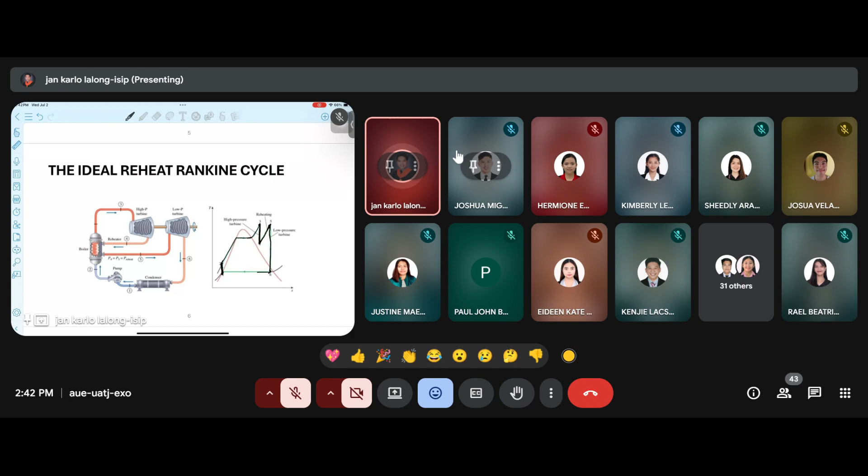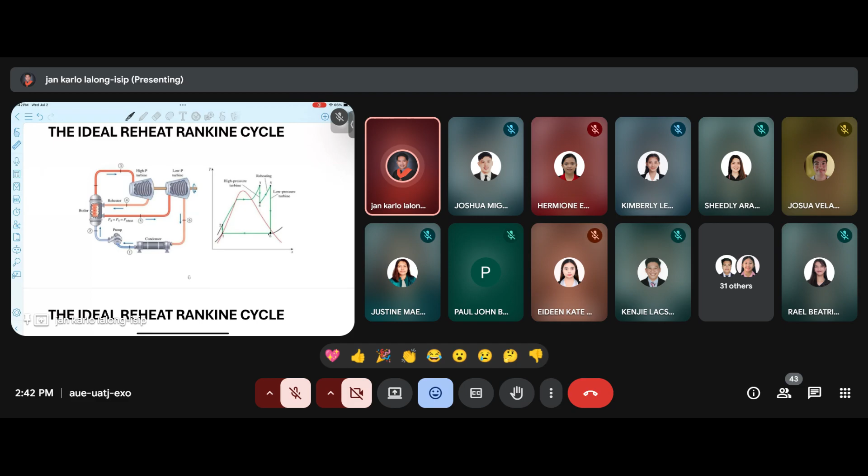Okay, so ito yung magiging itsura ng ating TS diagram, and this is our schematic diagram. But don't worry, the computations are still the same as what we do in our ideal Rankine cycle. Okay, so may iba lang tayo when it comes to our heat added and also our work ng turbine.

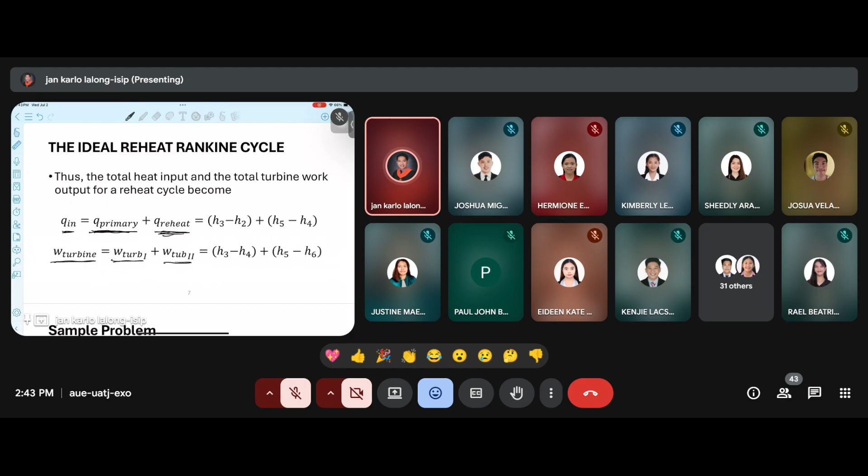Kasi nagkaroon tayo ng dalawang beses na heat addition. So meron tayo yung unang heat addition at yung ating reheat. So yung QA natin, that is the sum ng ating primary heat addition at saka yung ating reheat heat addition, yung reheat process. Okay? So yung work ng turbine, that is the work ng high pressure turbine plus the work ng low pressure turbine. Okay, so yun lang yung iba, but all of the process and the formulas na gagamitin natin, the energy balance, is just the same with our ideal Rankine cycle.

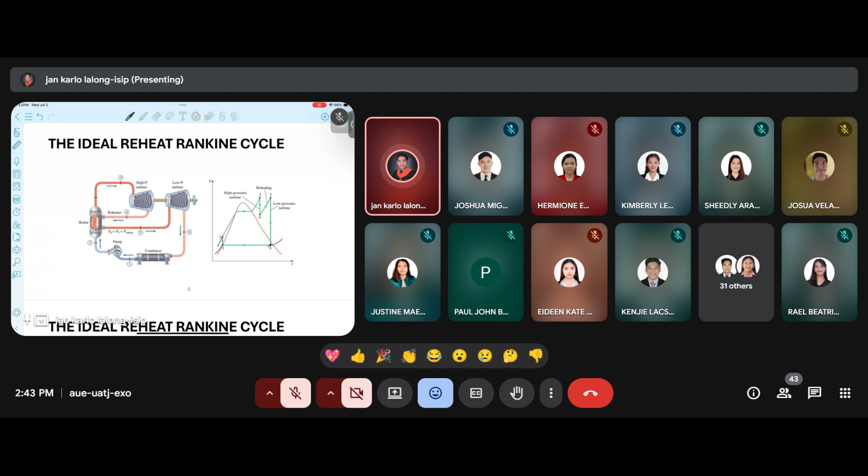Okay, so let's try to solve this one. We have here the sample problem. We are going to consider a steam power plant operating on the ideal reheat Rankine cycle.

Wait lang. Excuse me.

Okay, so let's continue the problem. So, sabi dito, steam enters the high pressure turbine at 15 MPa and 600 degrees Celsius and is condensed in the condenser at a pressure of 10 kPa. If the moisture content of the steam at the exit of the low pressure turbine is not to exceed 10.4%, we're going to determine the pressure at which the steam should be reheated, and the thermal efficiency of the cycle. We are going to assume the steam is reheated to the inlet temperature of the high pressure turbine.

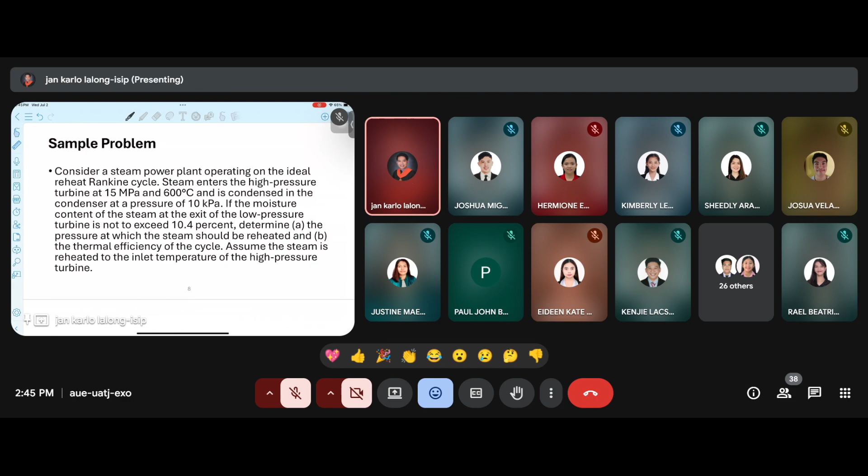Okay. So let's have first the schematic diagram. Sabi dito, we're going to consider an ideal reheat Rankine cycle, so meaning we have two turbines na gagamitin. Okay, so still this is the same with our previous topic. Siyempre, we have our pump. Ibahin lang natin ng konti yung ating figure, but same pa din naman yan.

Okay, so we have the pump, and the pump will pump yung ating saturated liquid water going to our boiler. Okay, so we have the boiler. And then, yung steam na magagawa ng boiler is pupunta sa ating high pressure turbine. So this is the high pressure turbine. And then, yung lalabas na steam dito will go back to the boiler for reheating. And then, pag na-reheat na siya, pupunta naman tayo sa ating low pressure turbine.

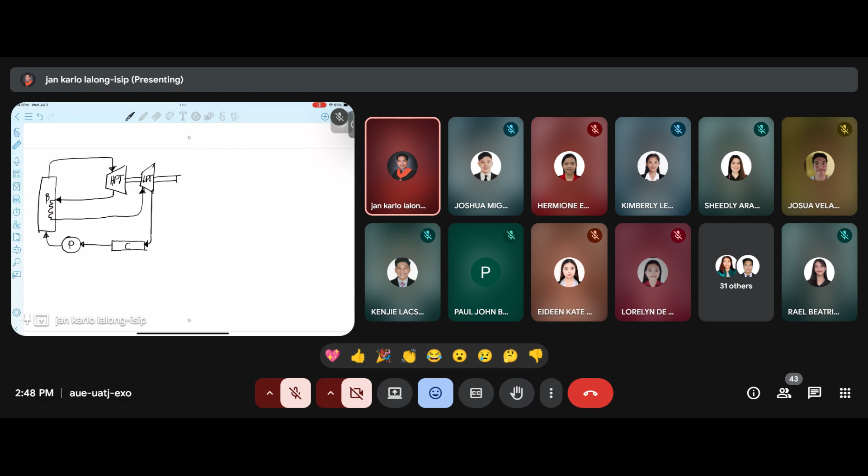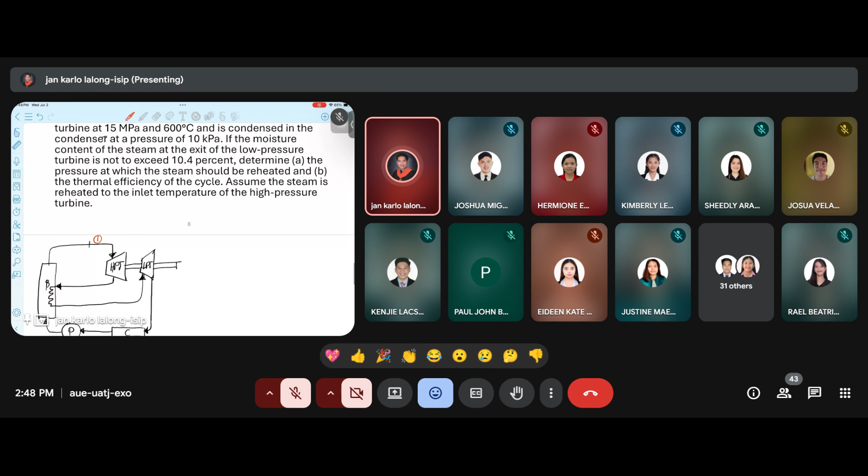Okay, so let's have our problem. So unang sinabi naman dito is the steam enters the high pressure turbine. So papasok sa high pressure turbine. So let's just make it as our state point 1, since ito din naman yung unang minention sa ating problem. Okay, so this is our state point 1. This is our state point 2. And then we have here our state point 3, state point 4, state point 5, and this is our state point 6.

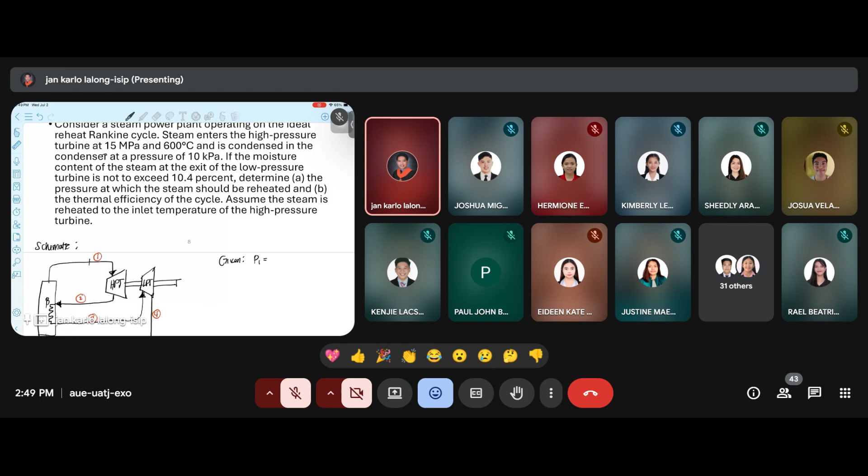Okay? So, naintindihan naman yung ginawa natin sa ating schematic diagram. So, having our schematic diagram, makukuha na natin ngayon yung ating given. So, yung given natin, we have the pressure that enters the high pressure turbine. So, that is our P1. Our P1 is 15 MPa. And then, our T1 is 600 degrees Celsius. Tapos sinabi, and is condensed in the condenser at the pressure of 10 kPa. So, meaning our P4, which is also equals to our P5, is 10 kPa or 0.01 MPa.

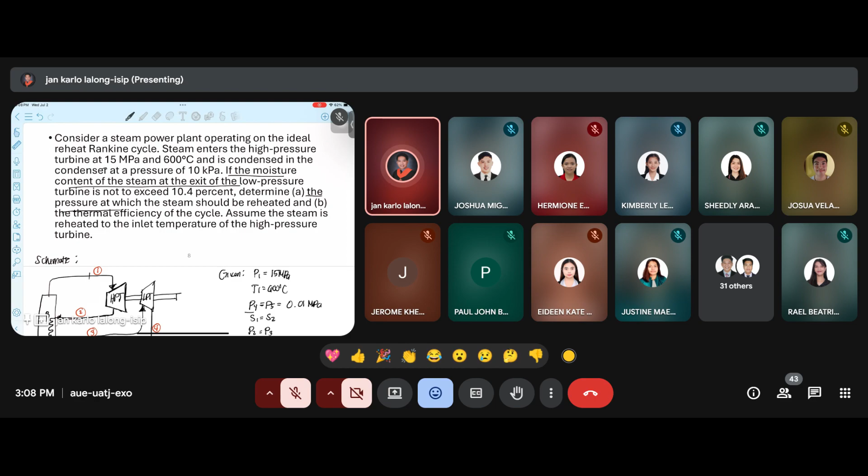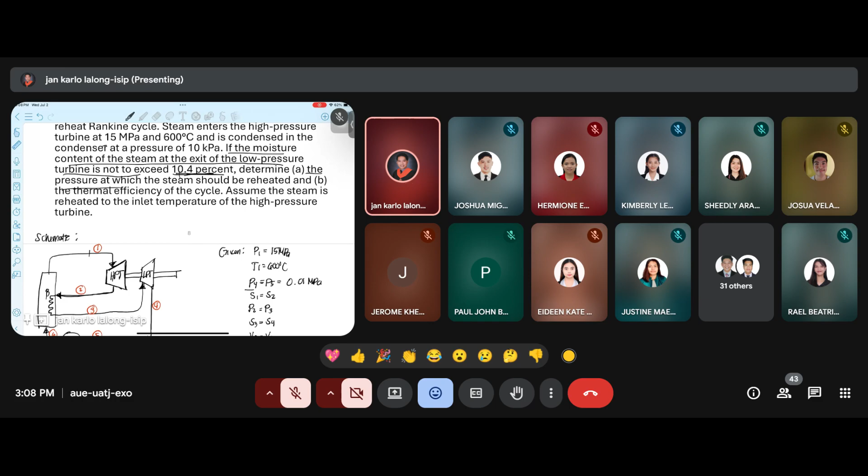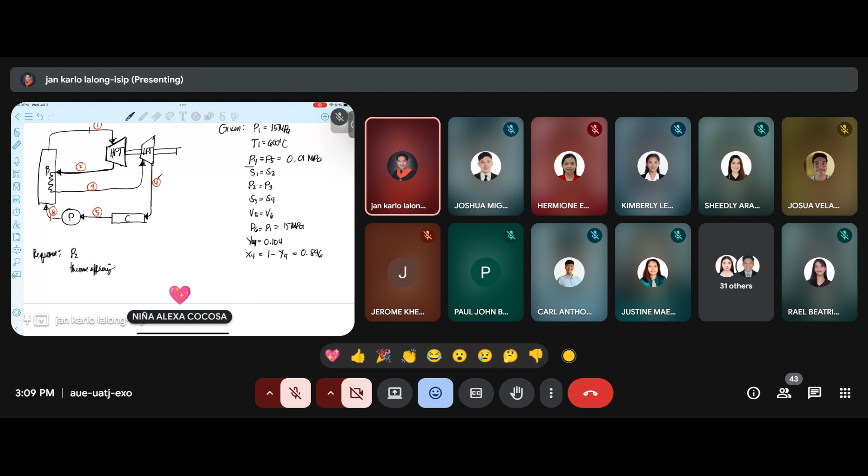Okay, so meron pa palang binigay dito. Sabi dito, if the moisture content of the steam at the exit of low pressure turbine is not to exceed 10.4%. So that is our moisture is 10.4% paglabas ng ating low pressure turbine, which is our state point 4. So meaning our Y sub 4 is equals to 0.104, and then makukuha natin ang ating quality ng 4. So our quality at state point 4 is equals to 1 minus our moisture at state point 4. What is 1 minus 0.104? 0.896. So that is our quality at our state point 4.

Okay, so since this is an ideal cycle, we need to write our assumptions. Our assumptions, again, this is in steady state condition. Wait lang, nagdidikit-dikit yung sulat ko. We have the steady state conditions, and then our change in kinetic energy and change in potential energy is negligible.

Okay, so we will now have our analysis. So, saan ba tayo nag-umpisa dito? So, pwede tayo magsimula sa state point 1 kasi given naman yung ating conditions for our state point 1. So, again, for our state point 1, we have our pressure 1 of 15 MPa and we are given of T1 na 600 degrees Celsius.

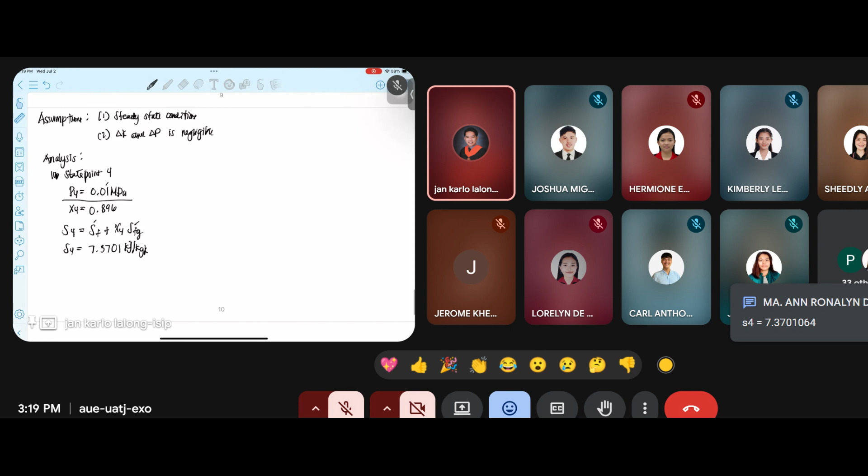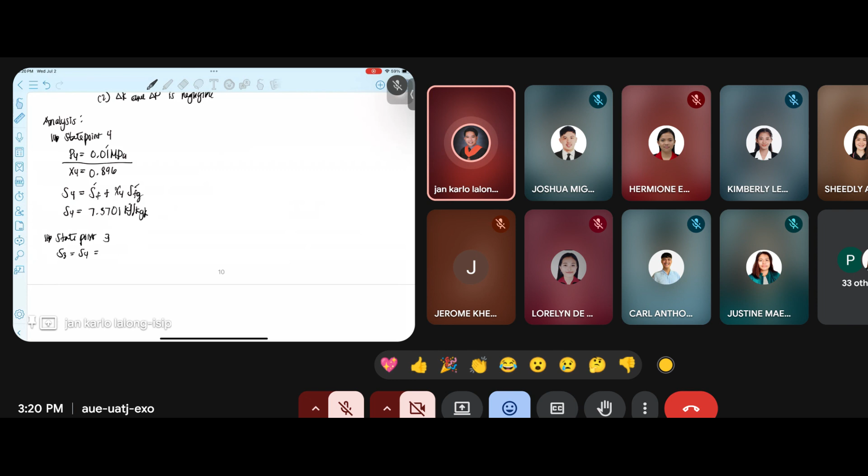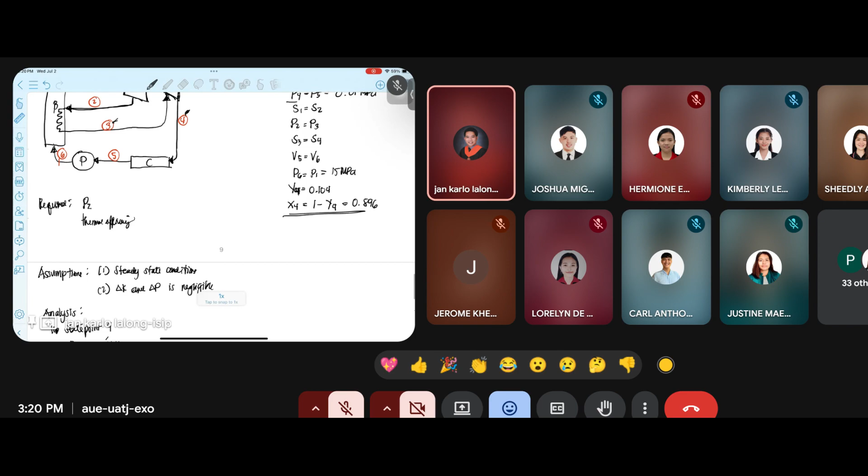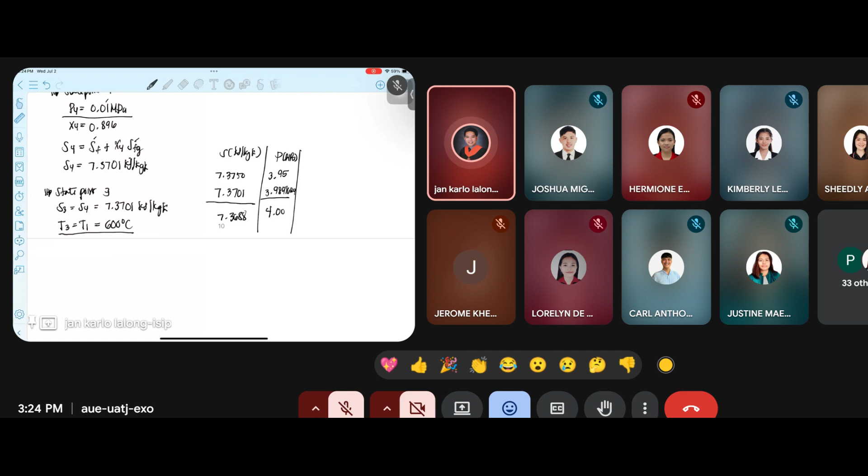Okay, so yan. Nakuha na natin yung ating P3. 3.989516129, that is MPa. Pero kung makikita naman natin, para hindi na tayo mahirapan, yung atin namang nakuhang pressure, that is very close na sa 4 MPa. So, wait lang. Kukunin pa kasi natin ng thermal efficiency, so kailangan pa natin yung ating pressure. So, pwede na natin sabihin na that is 4 MPa. Ano? So, our P3 is equals to 3.9891. Tama ba? Mali.

We have 3.9894. Wait lang, ano yung tamang sagot natin? How about the others? Can you confirm ano yung nakuha nyo after interpolating yung ating given? Ito na, yung kay Buena Cifra ba? Nasagot? Kasi magkaiba yung sagot ni... Okay, so decimal lang din naman yan. So that's fine. We have 3.989516129. And this is in MPa. So it is safe to assume that this is 4 MPa.

For the sake lang, kasi kukunin natin yung ating mga values mamaya. And mas mahirap kapag yung pressure natin is not exact. So that is a special case lang kapag pressure yung ating ira-round off. Okay, so we have now our state point 3. We have the pressure of 4 MPa and the temperature of 600 degrees Celsius. So what will be the value ng ating H3? So pakikuha. That is a superheated vapor, 4 MPa, tapos 600 degrees Celsius.

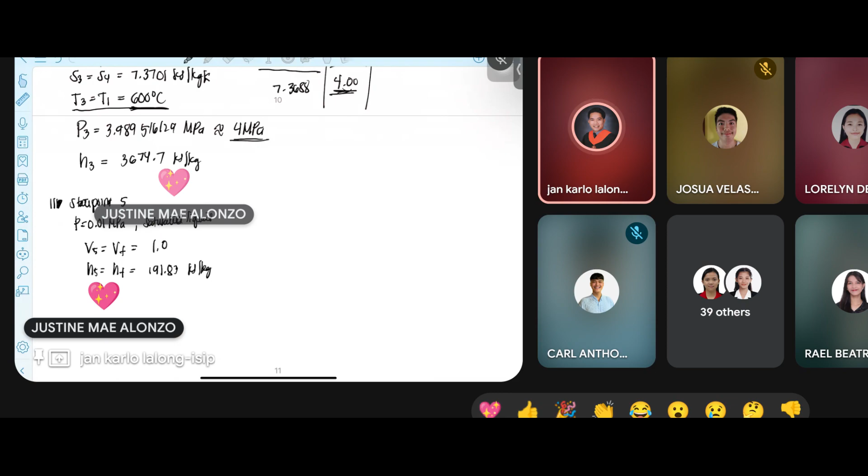Okay, may H5 na. Sabi ni Abrea, this is 191.83 kilojoules per kilogram. Others, can you confirm? And then yung V5 daw natin is 1.0102. Again, that is times 10 raised to negative 3. Don't forget that. That is meter cube per kilogram. Okay, so okay na tayo sa state point 5. Punta tayo sa ating state point 6.

Again, sa state point 6 natin, we have a pump. So, pag may pump tayo, kailangan muna natin mag-energy balance dyan. So, if we have our pump, we have our work ng pump, which is going in. Then, we have our state point 5 na papasok, and then state point 6 na lalabas. So, again, we have the formula for our work ng pump. And that is our volume times our change in pressure. So that is P6 minus our P5.

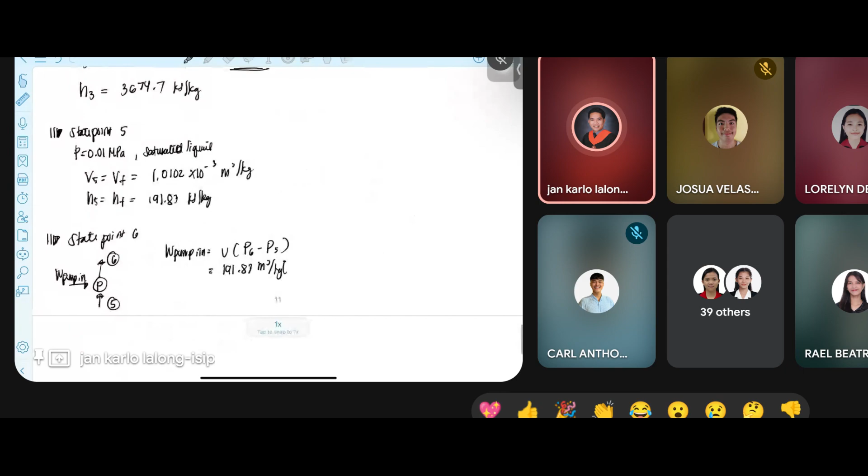Given naman yung ating volume na 191.83 meter cube per kilogram. And then yung P6 natin, balikan natin, our P6 is equals to 15 MPa. So that is 15,000. Minus yung P5 natin. Okay, may tanong, ano yun?

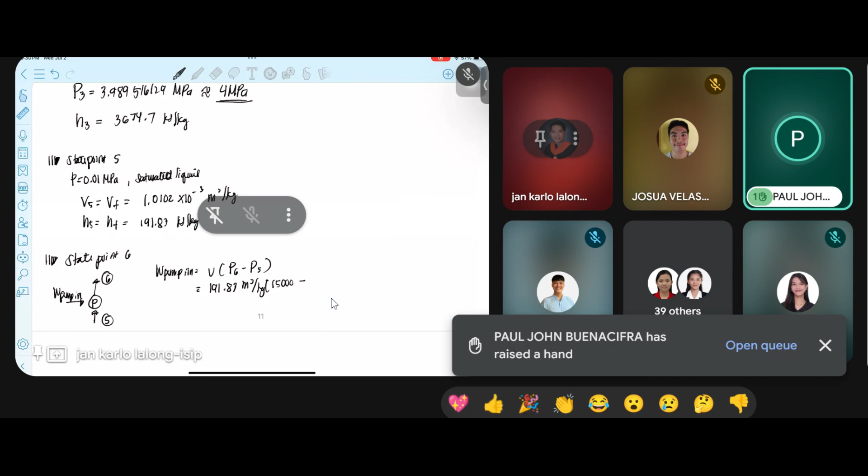Sir, nasulat niyo po ata yung H. Alin? H. Dapat po ata, di ba po volume? Volume. Alin yun? Wait lang. Yung 1.0102 po. Okay. H pala yung nasulat ko. Sorry. Yun pala. So we have 1.0102 times 10 raised to negative 3. Okay, so thank you for that.

And then we have our P6 na 15,000 kPa. So again, that is in kPa. And then our pressure 5 is 100 kPa. So just for the conversion purposes, 1 kilojoule per meter cube is equals to 1 kPa. Para makancel natin yung kPa, tapos cancel natin yung meter cube. So what will be the value ng ating work pump in?

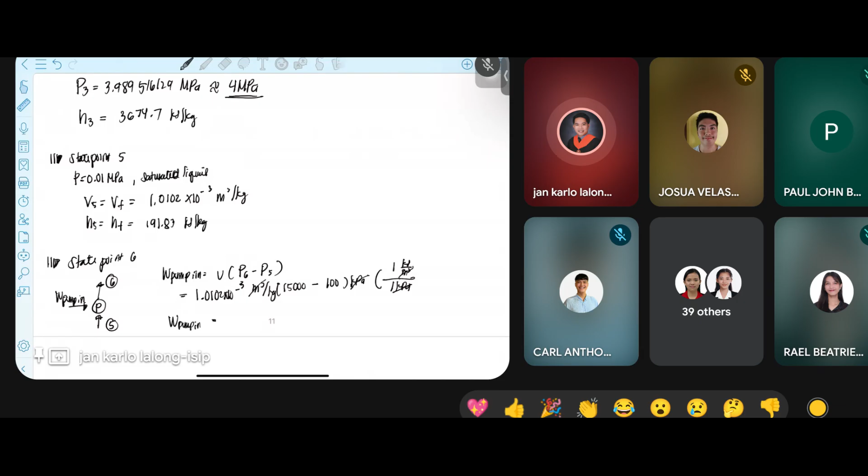Okay, may na-compute na ba na value? Okay, so meron na. We have 15.051. Okay, meron bang tanong? Ano yan? Sir, doon po sa P5 po, 10 kilopascal po ba siya? Alin? P5 natin? Opo. Doon sa P5 po, 10 kilopascal. That's 10. Okay. 100 po ang naisulat. Ano ba yan? Mali-mali na. Okay. So, tama. That's 10 kPa.

Pero, tama pa rin ba yung sagot? 15 point or may iba? Same pa din? Decimal. Okay. So, ano yung ating magiging sagot? We have 15 point... Okay, sorry. 15.142898. And this is in kilojoules per kilogram. Okay na?

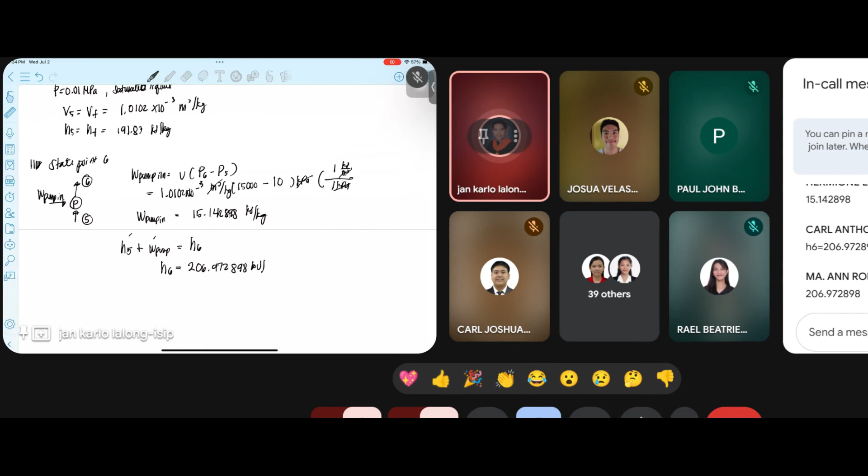Okay, so again, mag-energy balance tayo para makuha natin yung H6. Energy in is equals to energy out. So our H5 plus our work ng pump is equals to our energy out, which is our H6. So what will be the value ng ating H6? That is H5 plus our work ng pump. Can you confirm kung tama yung sagot ni Abrea? 206.972898 kilojoules per kilogram. Okay, same naman kay Dehan.

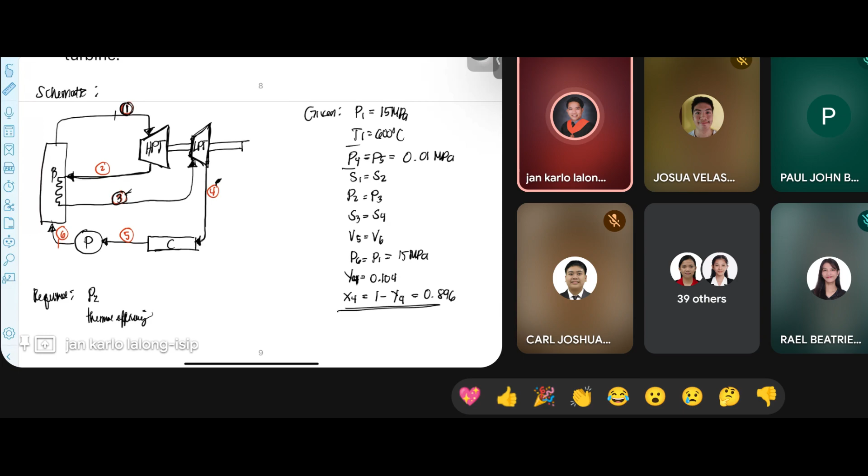Okay, so may H6 na tayo. So ano na yung sunod nating state point? After ng state point 6, punta naman tayo ng ating state point 1. We have the state point 1 na our pressure is equals to 15 MPa and our temperature is equals to 600 degrees Celsius. Tama ba? 15 at saka 600. So again, this is a superheated vapor. Kaya what will be the value ng ating H1 at saka ng ating S1? Punta kayo ng table 3 since this is a superheated vapor. I just want to rewrite natin yung ating H1 and S1.

Tama ba yung sinend ni Abrea? 8,675? That is in 15 MPa, ha? So, at 15 MPa, let me just check. Tapos, we have 600 degrees Celsius and then 15 MPa. Hindi ba yung 3,582.3? Yan, okay. So, we have 3,582.3 kilojoules per kilogram. And then, what will be our S1? We have 6.6776. And this is in kilojoules per kilogram Kelvin. Okay na tayo for state point 1.

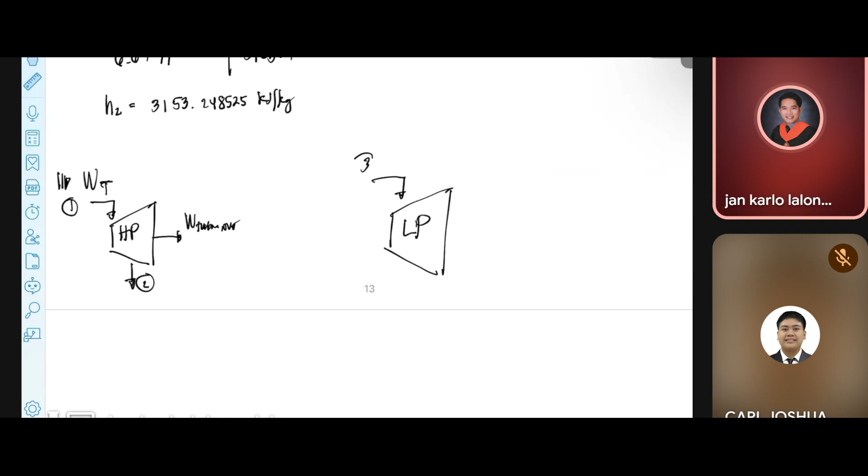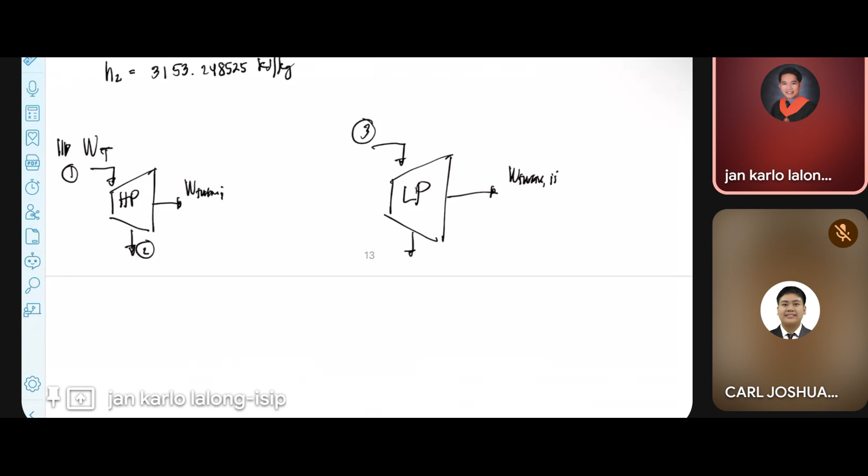Okay, so next we have our letter B, the thermal efficiency. So again, pag thermal efficiency, ano yung mga kailangan natin? So first, we have our work net. So work net, kailangan natin ng work ng turbine. And our work ng turbine, kailangan natin mag-energy balance. So we have work turbine out. And then ano yung papasok natin sa turbine? Sa high pressure natin, we have our 1 and 2. This is again high pressure turbine. So we have state point 1 and state point 2. And for the low pressure turbine naman natin, papasok dyan is our state point 3. Tama ba? 3 ba yan? Tama, 3. And lalabas yung state point 4. So this is work turbine 1. And then this is work turbine 2. So this is state point 4.

Okay? So para makuha yung ating work ng turbine 1, again, this is H1, this is H2, this is H3, this is H4. So again, this is energy in. Energy in equals energy out. So shortcut ko na lang. So para makuha natin yung work ng turbine, this is the first turbine, that is equals to H1 minus H2. While yung ating work ng turbine 2, that is equals to H3 minus H4. Okay, so pakisolve nga, what will be the value ng ating work ng first turbine natin? So that is H1 minus H2.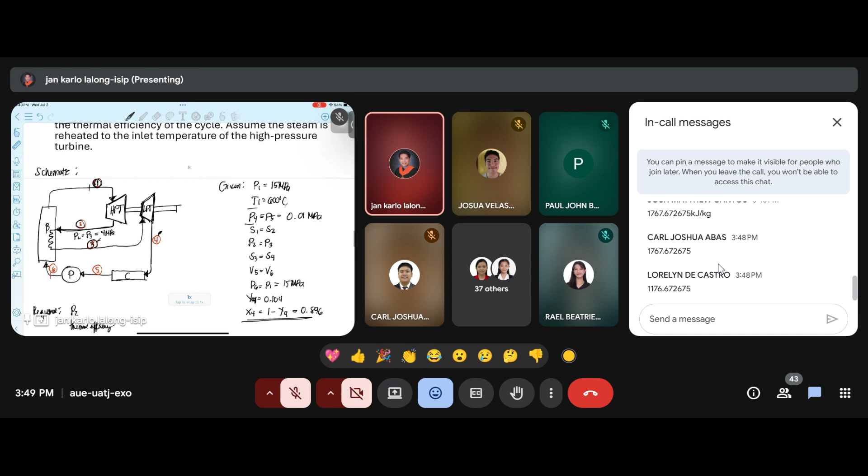So dalawang beses tayo nagka-heat addition. First is state point 6 and state point 1, and then naulit siya sa ating state point 2 and state point 3. Okay, so if we have our boiler, so papasok dyan is our H6, lalabas yung ating H1, and then papasok din yung ating Q in. Ito yung una nating heat addition. And then yung pangalawa nating heat addition, pumasok yung ating H2, lalabas yung ating H3. And then again, we have Q in.

So dito muna tayo sa ating first heat addition. So again, that is energy in. My energy in is equals to energy out. So our Q in is equals to our H. Bali, lilipat yung H6. So H1 minus H6. And then for this one, that is H3 minus H2. Okay, I think we will have complete values naman, kaya masosolve na natin yung unang Q in. Okay, so lagyan lang natin ulit ng label. So we have Q in 1, and then we have our Q in 2.

Okay, so for Q in 1 natin, or yung ating primary heat addition, what will be the value? That is H1 minus our H6. Balikan natin. We have naman yung ating H1 dito, and yung H2 naman natin is ito. So we have 3582 minus 3153. Ay, mali pala. 6 pala. So we have 3582 minus 206.972898. Paki-minus lang nito. Ito at ito.

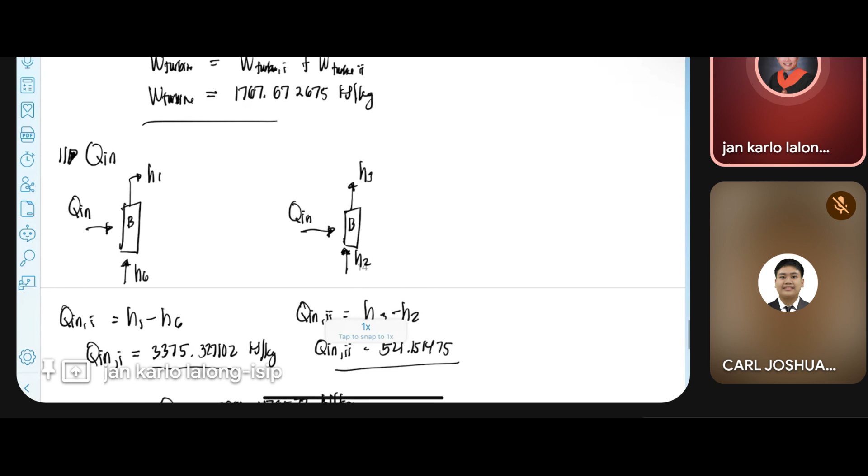So again, our thermal efficiency is our work net over our Q in, and our work net is our work ng turbine minus our work ng pump over our Q in. Okay, so ito yung ating Q in. Tapos ito yung ating work ng turbine. Tapos kanina na-compute natin yung work ng pump. Ito, work ng pump. Okay, so what will be the value ng ating thermal efficiency?

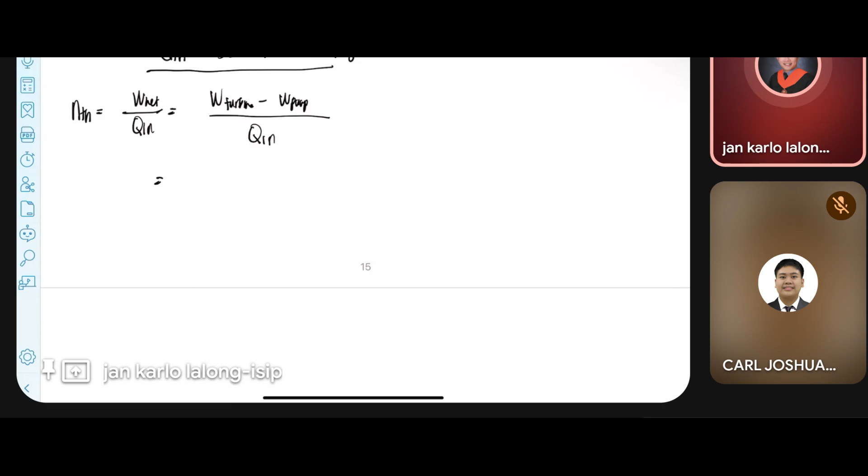Okay, may nakuha ba for the thermal efficiency? Okay, how about the others? Team Bakay Arena. Let me just check yung makukuha. Okay, so that's correct naman. Okay, so we have 0.44977272223. Okay, so in percent, that is 44.977272223%. Okay, so we now have our thermal efficiency.

Again, so naalala nyo pa ba yung mga thermal efficiency natin nung nagko-compute tayo for our simple Rankine cycle? Diba? That is just around 20 to 30, 30 above percent. So kung makikita natin when we compute for the thermal efficiency, when we add yung ating reheat sa ating Rankine cycle, umabot siya ng 44%. Okay, so that is the effect of having a reheat in our simple Rankine cycle. So we are increasing yung ating thermal efficiency. Okay, so naintindihan ba yung ating reheat Rankine cycle? The process and the concepts involved?

Okay, so do you have any questions? Any concern? Wala naman? Okay, so ayusin ko lang din yung inyong part 2 ng problem set involving our reheat Rankine cycle, and I will post it in the Google Classroom. Siguro 2 items lang din naman yun. Okay.